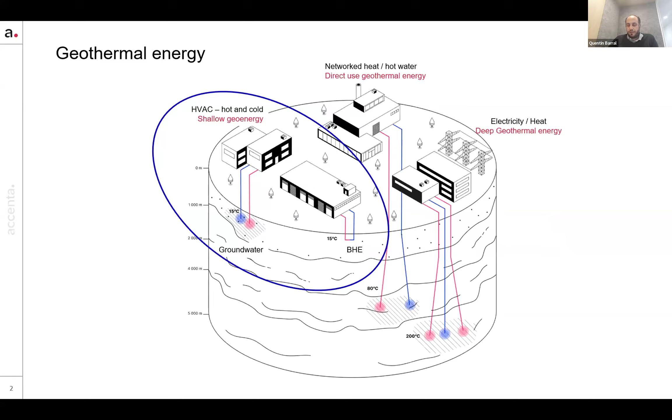Our company is working in shallow geothermal energy, so that everybody here knows about geothermal energy. Accenta is in the shallow business, few meters to 300 meters, either on closed loop borehole exchanger or on groundwater, but our concern is delivering heat and cold to buildings, individual buildings, big buildings. I will present some examples at the end of the presentation.

Our driver from the beginning, 10 years ago, was that geothermal energy and geothermal heat pumps are the best way to provide heat and cold efficiently for buildings, but it's very expensive. That's why in France, for example, where we work today, geothermal energy represents 2 to 3% of the energy shares in buildings, so it has to be used as efficiently as possible, not just in terms of energy, but also in terms of economy.

To do so, we transform the heat exchanger, which has mostly been used as a heat extractor from the underground, into a thermal battery, managing to produce, capture, or whatever renewable energy, either from industrial sources close to the building or from solar panels, either PV or thermal, and store the energy in the ground, in the heat exchanger, then produce for the building when it's needed the heat or the cold, or both, for comfort, for domestic hot water, for the process if it's an industrial site.

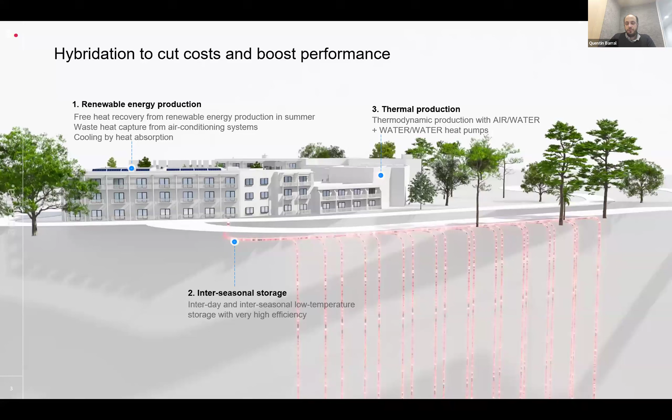In order to be able to sell it and implement it, we process all the phases from the design, from the first assessment to the feasibility, the design of this complex hybrid system, and then implement it. We work as an EPC — engineering, procurement, and construction — company, providing our clients all they need to have heat and cold produced in their building, and then operating the systems because they are complex or hybrid. They have to be.

We need to have a chief for this orchestra, and that's what our software does in the boiler room, in the technical room, with heat pumps and with the several systems.

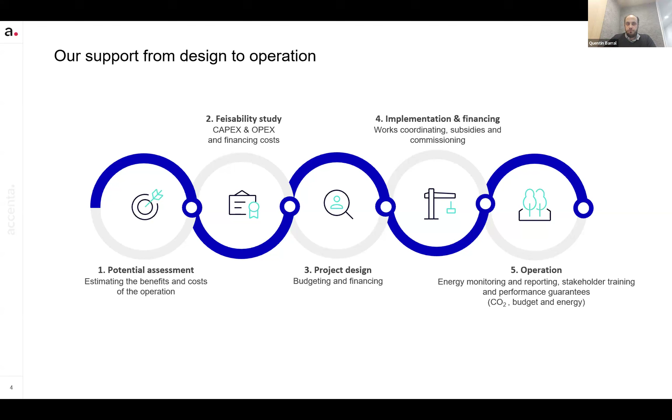Very quickly about drilling, because it's our subject for all of us in EGEC, so that everybody has the same level of comprehension: our systems are mostly based on borehole exchangers because it's more scalable, more industrializable. That's our belief, and there's nothing new in this exchanger that we do — it's very classical, at least in the French market, W probes. Very happy to look forward to the Separatus performance just after.

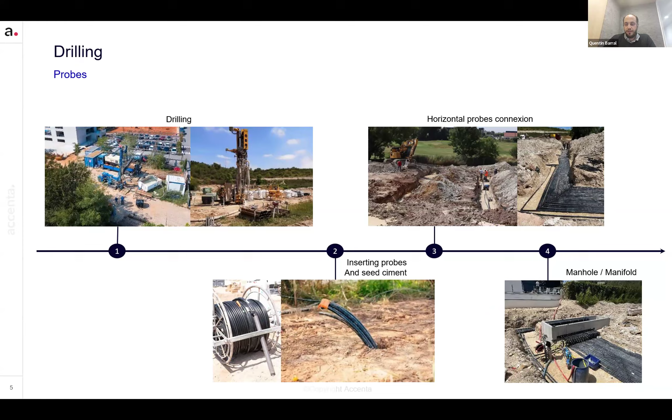Where we have developed more engineering, it's in the technical room, where we're still developing a system that can be standardized and industrialized. So here you see two water heat pumps.

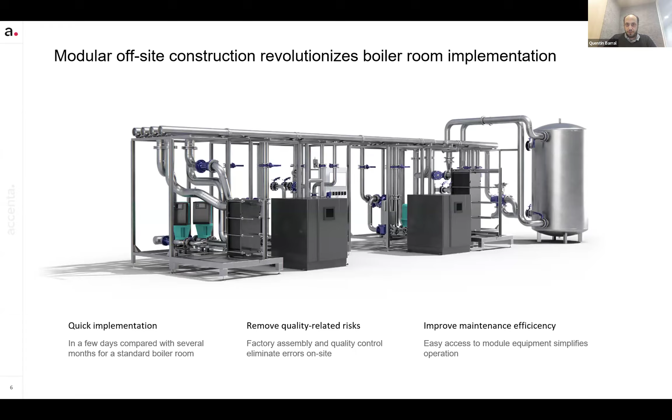You see a water tank, heat exchanger and circulating pumps, very standard for a geothermal energy system. What is not standard, and what we want to standardize, is that all the systems are built outside of the site, then brought and assembled in one week on site. It's very quick to implement and build the technical room on site, so it's much more quality, much more efficacy, and less cost compared to the classical 3 to 4 months of work of coactivity in a building for construction of the technical room.

So just a few examples, I have 4 that I will present. First, collective housing in city Gex close to Geneva, 4,300 square meters. In this system it's a mix of geothermal energy based on 17 probes, 2 geothermal heat pumps, and 3 cascaded gas boilers that have been kept to manage the very high power demand on Monday morning when everybody needs their shower. The balance in the underground for the thermal battery is managed with a field of thermal solar panels.

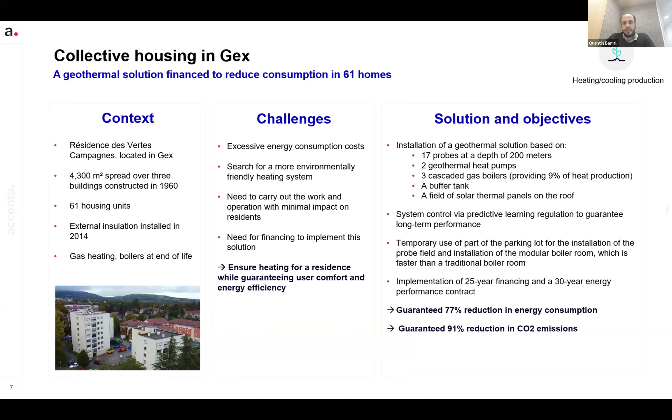Second example, this is a building, an office campus, 39,000 square meters. We replaced all the existing gas heater and classical air conditioning with 9,000 meters of borehole exchanger, cumulative length.

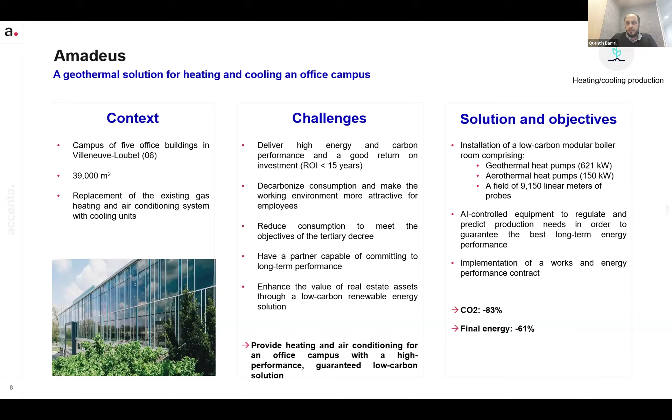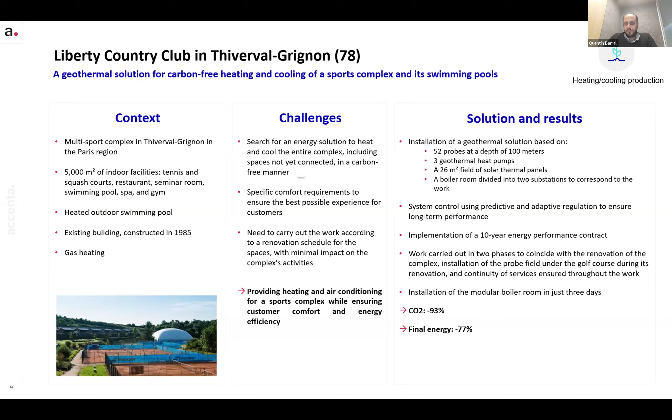Third one, a sport campus with 2 swimming pools, one indoor, one outdoor, tennis, paddle, and other indoor sports facilities, 5,000 square meters total. Here it's a mix of heat pumps, geothermal heat pumps, and solar panel—that's 265 square meters, not 26, a typo. The last one is a warehouse, a product storage warehouse, quite a big surface too, with a mix of geothermal heat pumps and aerothermal heat pumps that bring heat and cold to this building.

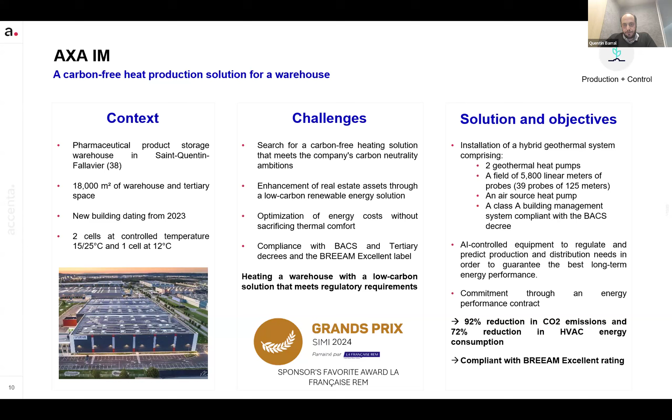That's it for the presentation.

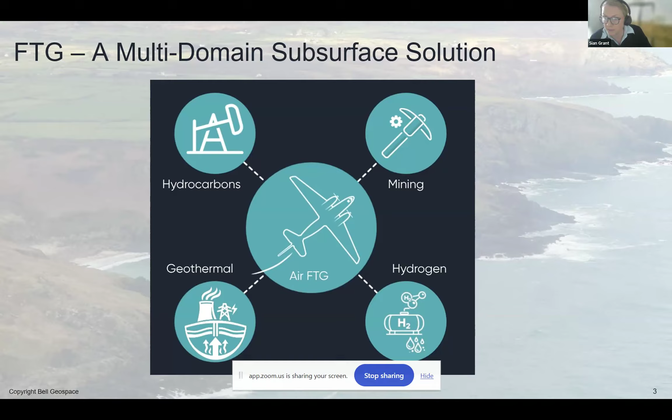For geothermal exploration in particular, this is very valuable for mapping basin architecture, major fault zones, structural controls, and potentially damage zones that influence heat flow and reservoir development. The technology is very well proven across other sectors, including hydrocarbon and mineral exploration, and more recently we're seeing real growth in geothermal and natural hydrogen exploration.

So why this particular data? What does it bring? Well, when developing geothermal projects, there are a huge number of questions to be answered, and not just in the geoscience domain.

Where are these large-scale structural controls? What are the geological structures, and what is the density contrast linked to faulting or basin geometry? And where should our exploration techniques and seismic campaign be focused?

Gravity data is particularly useful in geothermal exploration because many geothermal systems are controlled by deep structural features, such as faults, basin margins, and basement highs. Airborne gravity allows us to map these structures quickly and consistently across quite large areas.

So even where legacy data, for example seismic data or even new seismic data or well data, may be quite limited, we can combine this with the FTG to construct a good 3D model of the subsurface, helping us understand basin geometry, what the major fault corridors are, and the depth to basement across our area of interest.

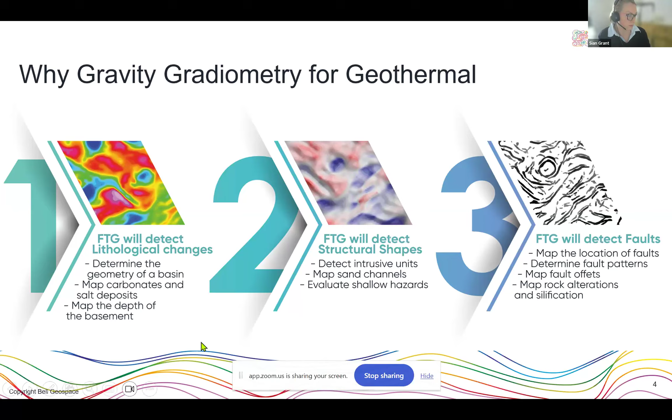So exactly where does it fit in the process, in the exploration phase? Throughout the project exploration and development stages, there's a need to balance exploration value with budget. Airborne gravity is often introduced in the early stages, where it can rapidly map large areas and identify regional structural trends at a very competitive cost.

As the exploration progresses, the data supports screening and evaluation and helps us define basin architecture and map out fault corridors that may control permeability and fluid flow, helping us prioritize the most prospective areas before moving on to other techniques, on-the-ground techniques such as seismic surveys and drilling.

And not forgetting the other challenges associated with geothermal projects. One of the realities is that the majority of these projects are going to be located close to towns, infrastructure, in densely populated areas. So that's going to create more challenges for traditional ground-based exploration methods.

Seismic acquisition, ground gravity, other surface techniques can face permitting constraints, environmental restrictions, access issues, and community concerns. Airborne full tensor gravity gradiometry offers a very useful alternative in these situations because the survey is flown from an aircraft. It's completely non-invasive and requires no ground equipment, no line clearing, and somewhat easier permitting to get the go-ahead for a project.

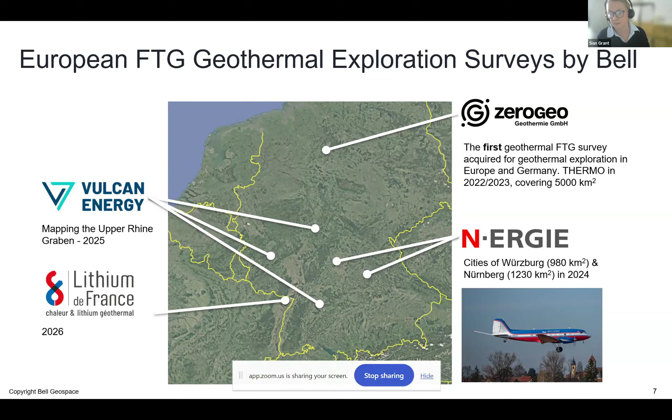As you see there, we have a couple of ongoing projects, one with Vulcan and one with Lithium de France. And these have dual purposes: geothermal energy and lithium brine extraction.

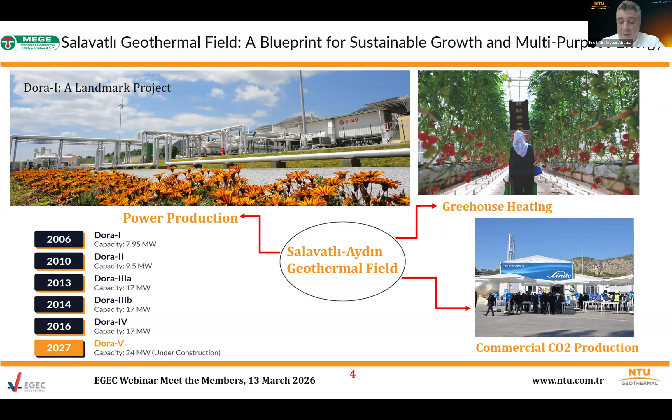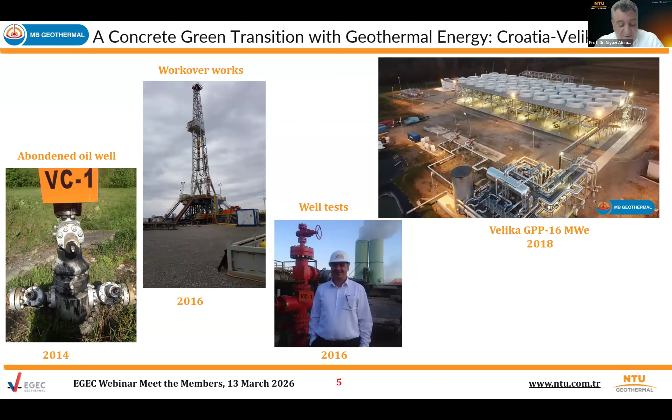As a result, the 16 megawatt Velika geothermal power plant was commissioned in 2018. Not only is Velika the first geothermal power plant in Croatia and the Balkans, but it also proved that the Pannonian Basin is one of the world's most important geothermal areas, with a potential of thousands of megawatts.

On the third example of NTU studies, we focus on the environment. Non-condensable gases, or NCG, produced together with geothermal fluids are mainly greenhouse gases and represent one of the key challenges in geothermal development. At NTU, we implemented a project to dissolve these gases into reinjection fluid and return them back to the reservoir. This is one of the most cost-effective ways to protect the environment, support sustainable production, and help mitigate climate change. The picture shows the compressor of an NCG injection facility in Turkey, where NTU provided consultancy and engineering services for Sanko Energy.

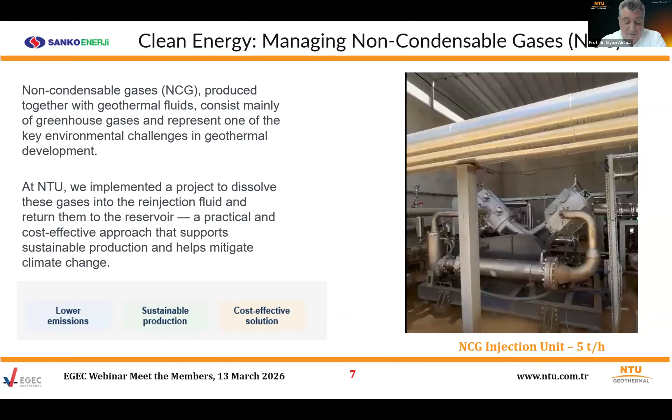Finally, that concludes my presentation. Thank you very much for your interest.

Thank you, Niyazi. Really interesting. I'll look if there's a question for you, not at this stage. So we understand that you're a consultancy company based in Turkey, but you operate all over the world. You mentioned projects you did in Turkey, Indonesia, Philippines. Are you still looking at this market, or do you focus more on Turkey, because we see now a new wave of power plants in Turkey?

Yeah, we have been studying many projects in Turkey, but some economic crisis exists in Turkey, so the geothermal projects have slowed down a bit, but at least 100 megawatts of power plant capacity is still under construction in Turkey now.

We are also studying in Croatia. Another Turkish company, Soyak Energy, is trying to improve a geothermal power plant in Croatia, but as you know, some bureaucratic problems are still slowing our projects there.

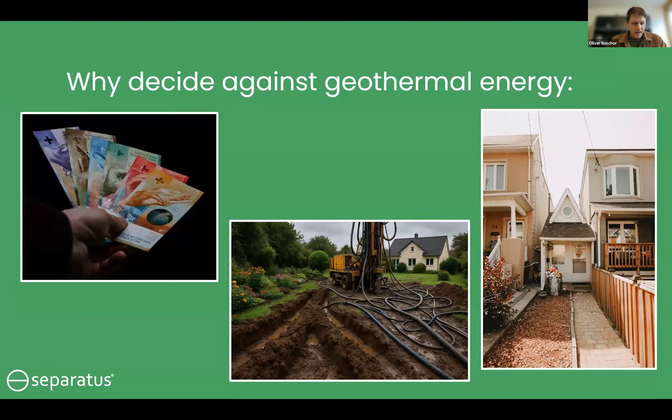We have developed the Separatus system, a solution with a modular, slim geothermal system where we have a split pipe technology. So we combine flow and return in the same pipe, separated by a thin wall in the middle, to realize geothermal energy for less cost, with less damage, and with less space needed for the realization.

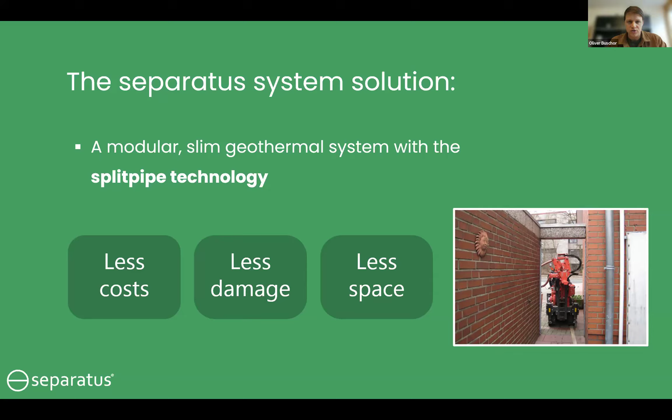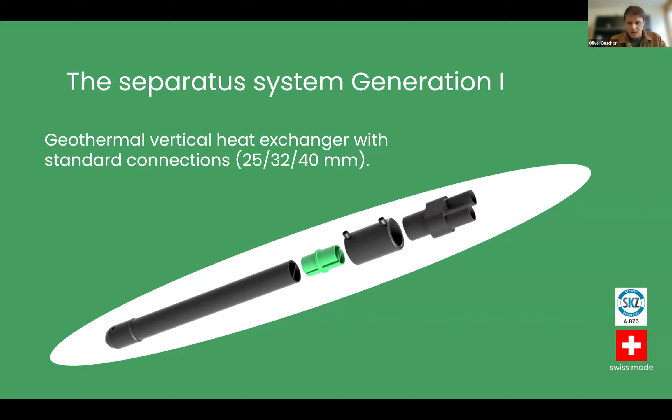So I will give you a short introduction about our system. What we have at the moment is a geothermal vertical heat exchanger, like a borehole loop with a standard connection in either 25, 32 or 40 millimeters at the top. We have the borehole loop, and a little connector which allows connecting the flow to the chambers of the flow and return with the head correctly, and then everything is welded with an electrofusion fitting. The probe is Swiss made, and we are already certified by SKZ.

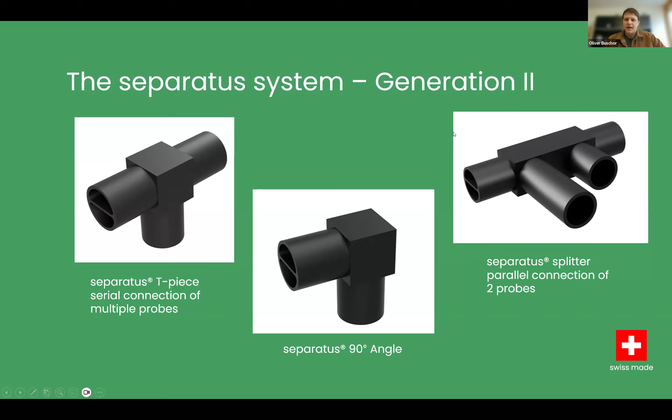We also developed the second generation of our products. We just published them last month at Geotherm in Offenburg. So we have a T-piece for the serial connection of multiple probes, a 90-degree angle to use the split pipe as well for the connection line, and we also have a splitter to connect two probes in parallel. In the long term, we also want to develop the manifold chamber with the split pipe technology.

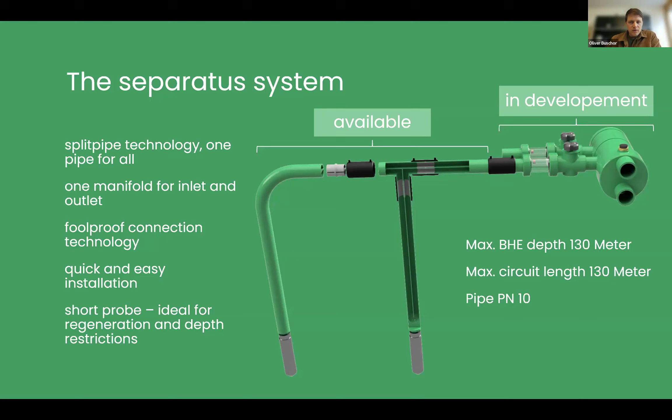So you only have one manifold chamber for the distribution and for the collection. The Separatus system, to say it in a few words, has a foolproof connection technology - you cannot connect them in a wrong way. It's quick and easy to install, and we developed especially a probe for short boreholes up to 130 meters, which is ideal for regeneration, but also if you have any depth restrictions. The pipe itself is PN10, so it's also a bit limiting the depth.

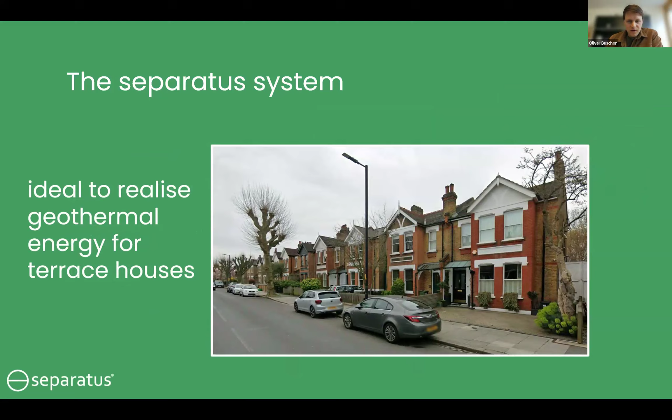So what we see is that we have an ideal solution for geothermal energy, for example, for terrace houses, but there are so many to be renovated, or where the heating system has to be changed, but there is no space for big drilling rigs. With air source heat pumps you also get some problems because of the noise towards the neighbor, so it's a very difficult area.

We also have the possibility with our borehole loop to energetically activate structural components in areas such as foundations or underpinning, anchorage or soil nailing. Our probe has a diameter of only 51 millimeters, so it fits in very small components, and it can be hydraulically connected in series very easily. So we started this cooperation with Ischebeck Titan, one of the well-known producers of micropiles.

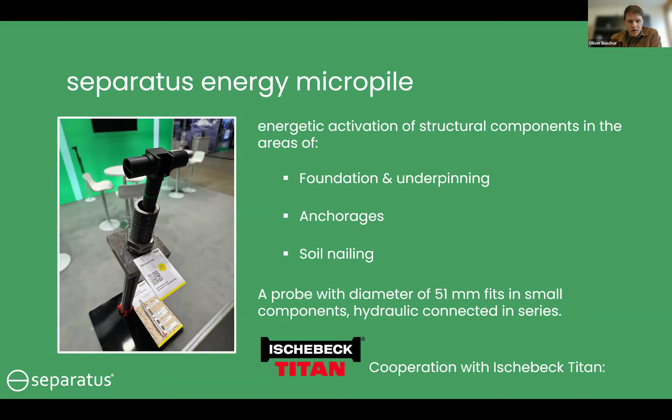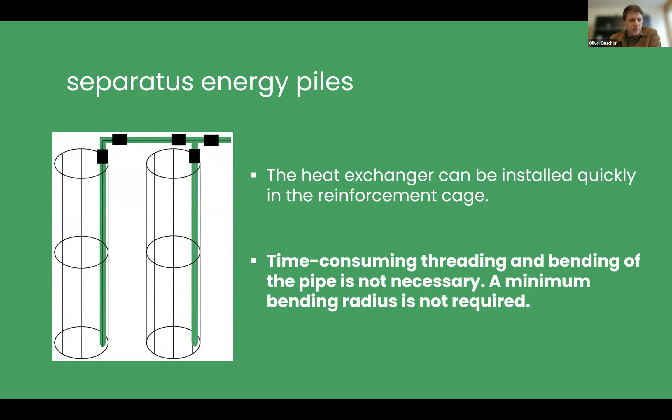Here you can see an example of a micropile which is self-drilled and backfilled with cement, and you can then install the Separatus probe into the inner part of the pile, which so far has usually no real usability. But you can also install Separatus in standard energy piles, where you just attach them to the reinforcement cage, so there is no time-consuming threading or bending of the pipe, and a minimum bending radius is not required. So I want to share with you the benefits of our system.

So the biggest benefit is that you can reduce the drilling diameter. With Separatus, you can drill with 100 millimeters and still install the probe easily and comfortably. If you compare it with a standard system, W32, that's often drilled with 152 millimeters, so it's much bigger.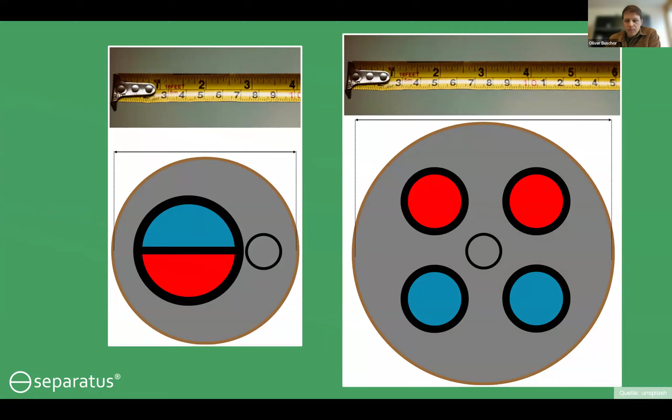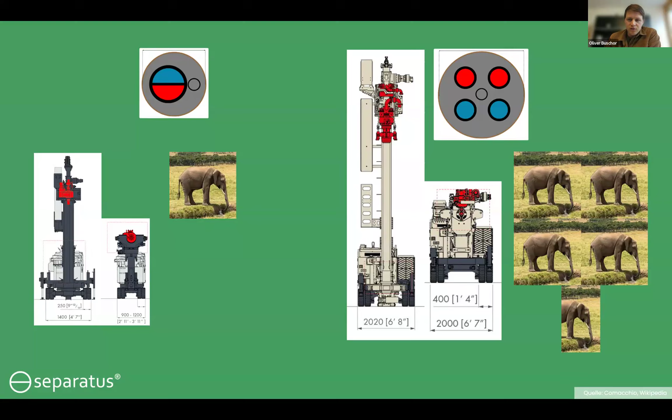Then the big advantage is that you can use a small drilling rig. I compare it here concerning the weight. So you can use a drilling rig with 3.6 tons, which is the equivalent of one elephant. In the standard we see today, a lot of borehole loops are installed with big drilling rigs, 15 to 16 tons, the equivalent of 4.5 elephants.

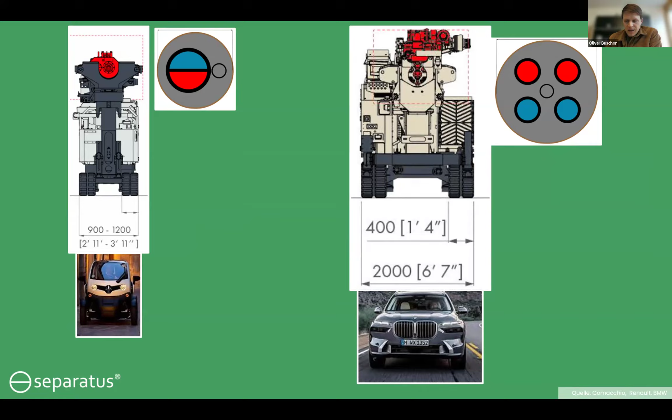But the size of the rig itself is also very important if you want to increase visibility in narrow spaces. On the left you can see the small drilling rig specifically used for Separatus, which can have a width of up to 1 meter, so it's very small. You can get into gardens. On the other hand, you have the big drilling rig with almost 2 meters width. You do not get into the garden easily, and you make a lot of damage once you're there.

And then if you compare backfilling material for 100-meter borehole depth: with Separatus and 100 millimeters, you use about 0.6 cubic meters. With 152 millimeters, it's almost 3 times more, so 1.5 cubic meters. That's real money you put into the borehole for only a little effect.

Then I want to show some references with you as well. We started the company in 2023, so we are still a small startup. We did the first test projects in 2024, and now we're in the market with EGEC certification since 2025, but we were already able to do realizations in Switzerland, Belgium, the Netherlands, Germany, Austria, and the Czech Republic — most recently in February, our first installation there. We will have our first installation in Spain in summer 2026, and we're looking for the first projects in the UK as well as France. If you know somebody, or if you're ready for this innovation, just get in contact with us.

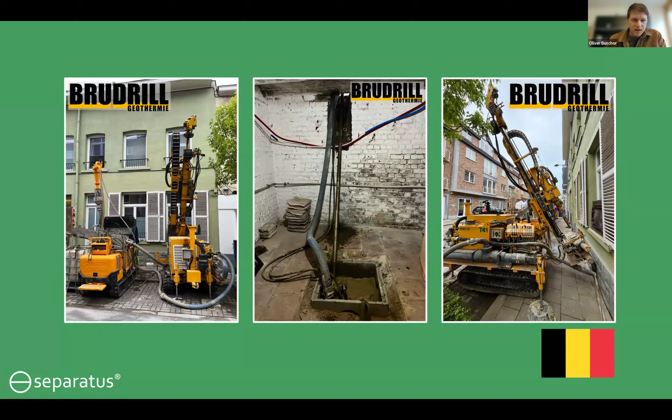I want to show examples, for instance from Belgium, where we work with Brudrill Geothermie, our drilling partner. They're specialized in geothermal energy in urban spaces, so they have small drilling rigs. Everything on the construction site is engineered to drill small diameters as well. So they really think about geothermal energy, and they can realize projects where everybody else would think it's not possible at that place.

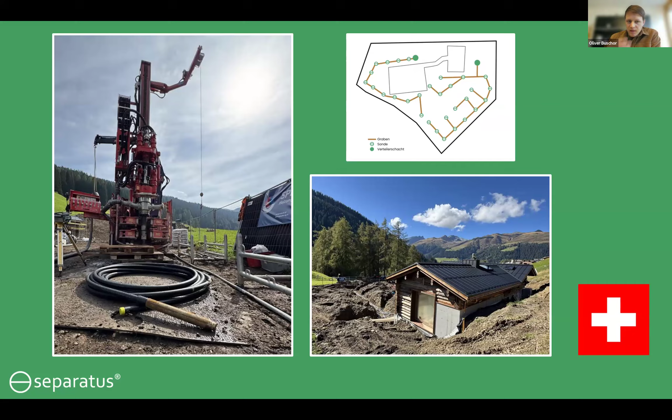We have references in Switzerland. Here's an example from Davos, almost 2,000 meters above sea level. The driller found artesian water, so he couldn't drill to 200 meters as he originally wanted. Then he switched to Separatus, and we realized 30 boreholes with 40 meters depth, with each 3 boreholes connected in series.

We also did realizations in Austria, where we could replace the heating system for a very old building, and it works very well at the moment.

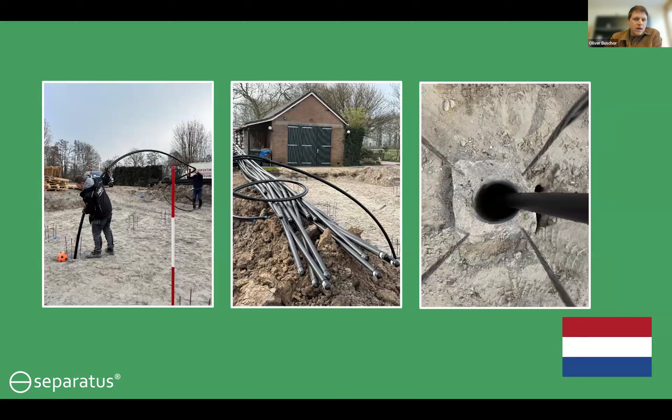In the Netherlands, we were able to activate energy piles. The piles were needed for the foundation of the building, and we were then able to deliver the probes for the geothermal activation of the piles.

So yes, we are Separatus. We are a young company, and we always think win-win, and we are actively looking for global collaboration partnerships. Thank you for the time, and if there are any questions, reach out to me.

Thank you, Oliver. Really clear, and really nice to see all this innovation and startup activity in geothermal. I don't know if there are any questions.

Me, I have a question. Is that so — you're a Swiss company, you manufacture everything in Switzerland, so showing again Switzerland as a champion in equipment manufacturing for shallow geothermal. How do you plan your next development in the business model — as manufacturers, developers, installers, operators?

We have outsourced the manufacturing to our partner who is extruding the pipe, and we have a partner in Germany, who is also an investor in the company, who builds the head and all the tools we are needing. From our side with Separatus, we mostly want to sell our probes to drillers or to investors in building development, but we also want to go new ways and do the marketing for geothermal energy directly to end customers.

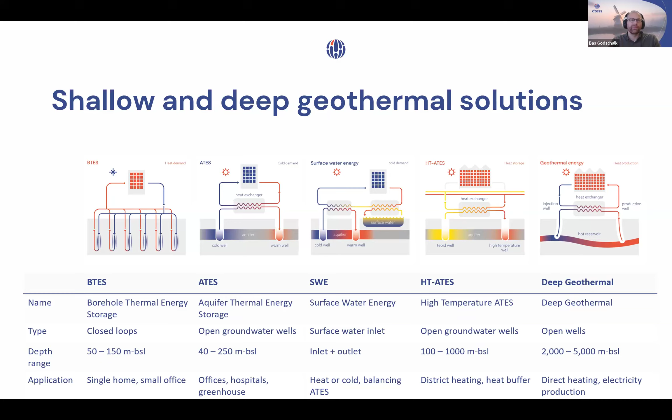The source for these systems could be deep geothermal. So I have some experience with deep geothermal, but my primary focus is on ATES, surface water, and high temperature ATES. Now let's dive a little bit more into the ATES technology itself - it's a very nice technology for heating and cooling buildings.

You have to think that the best performance is when it works as a battery of heat and cold. During wintertime, you take out the cold from the building and store it in the cold well. Then during summertime, you abstract the cold water, use it for cooling down the building, and the heat of the building will be stored in the warm well, which you use in wintertime to heat up the building.

Normally, we operate the cold wells with temperatures around 5 to 10 degrees. The advantage of that temperature level is that you can use it directly for cooling your building, which gives you a very high COP. In heating mode, the warm well is often between 13 to 17 degrees, and when you heat up the building, you need a heat pump to increase the temperature level to 40 or 50 degrees for heating the buildings.

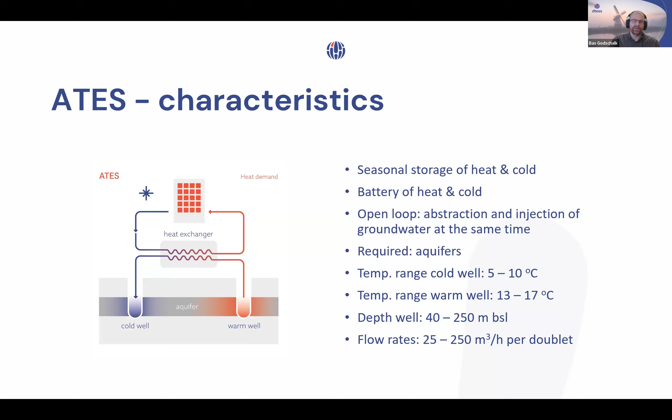A requirement of this technology is that you need aquifers. That could be sand aquifers, but in some cases, like in the UK, we have worked with limestone or sandstone formations. Typical flow rates are between 25 to 250 cubes per hour, which generates a capacity of 250 to 2 megawatt cooling or heating capacity per doublet system. A doublet is one warm well and one cold well.

As mentioned, in the cooling mode, because we can have direct cooling of the building, you have a very high COP, coefficient of performance. So with one piece of electricity, you generate 30 to 40 pieces of cold. Compared to air conditioning, the COP is 3, so one piece of electricity gives 3 pieces of cold. You can see that this is a very efficient technology.

In the heating mode, you always need a heat pump, which limits the COP to 4 to 5. The advantage is that this is one unit, but if you need more, you can multiply the number of doublets, so you can increase your capacity and tune and design it according to the wishes and demands of the building.

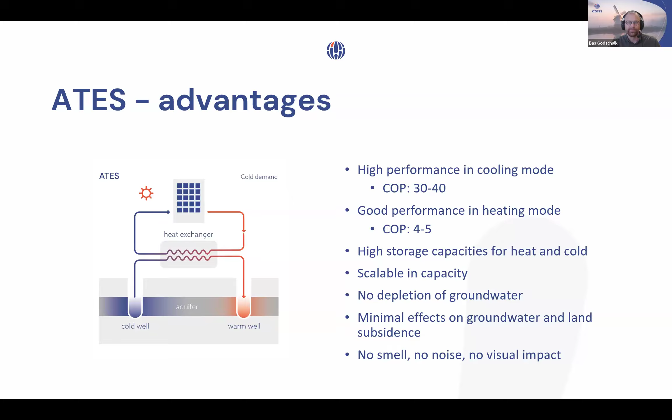Now, where is this technology applied? Especially in office buildings, because office buildings often need heating and cooling, so that's a very good combination. Nearly all Dutch hospitals have the ATES technology. We see it in university campuses, also in greenhouses, airports, shopping centers, residential areas, and also data centers is an upcoming market.

They use the ATES system to store cold and then reuse it for cooling the data centers themselves. The new step is that we not only use the ATES system for heating and cooling, but as a heat storage medium, large-scale heat storage. You can use it in the middle range temperature, between 30 to 50 degrees, and also in a high temperature ATES system with temperatures between 50 to 125 degrees. The idea is that in summertime, there's often a surplus of heat, or there's still production of geothermal heat or solar panels or collectors producing heat that you don't need at that moment. So when you store it in your ATES system, you can reuse it during wintertime when there is additional need for heat.

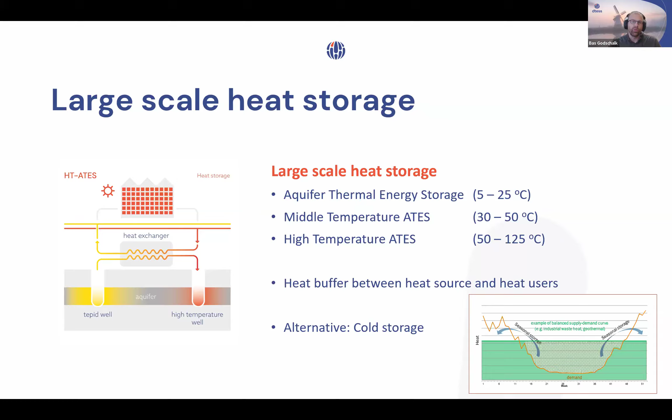Now, why am I working on these technologies? Because I'm really motivated to bring this technology abroad. In the Netherlands, about 40 years ago, we started with the first systems, and during the years we've seen an increase of ATES systems in the Netherlands. At the moment, we have around more than 4,000 systems.

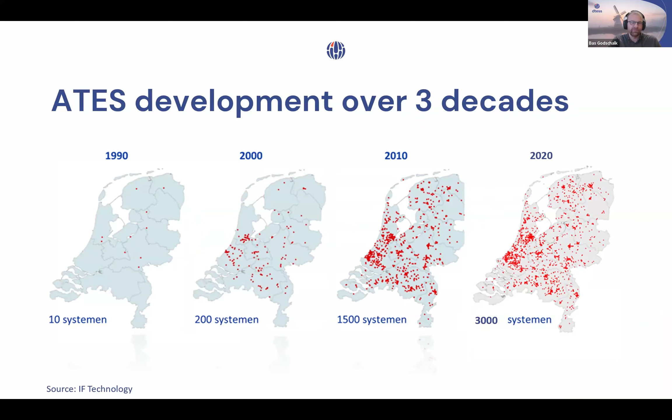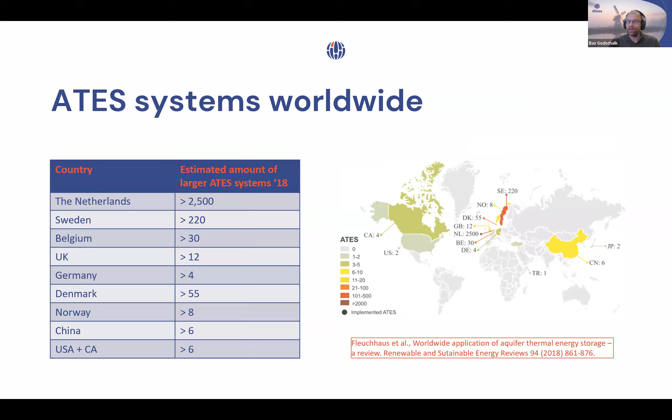But when I look around the rest of the world, and this is published by a German PhD student, I see that in the Netherlands there are many systems, but in the rest of the world we just see a very small number of ATES systems. That was my strong motivation to say, okay, how can we spread the knowledge, technology, and experience of ATES in the world? Because I believe it's still a sustainable and reliable technology, but due to a lack of knowledge and experience, it's not so applied in many other countries.

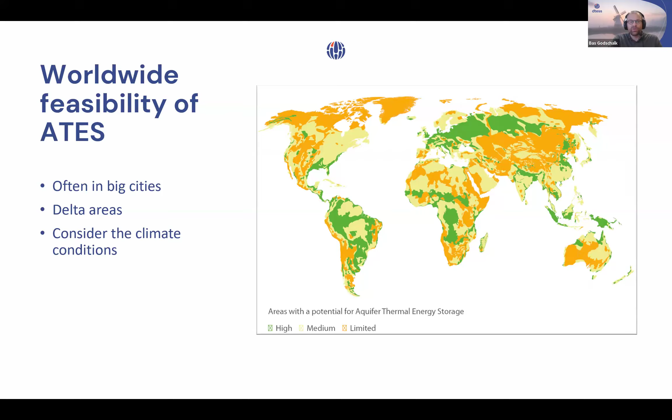So is it possible in other countries? I think yes, especially in the green areas. It's also good to know that these green areas are often kind of deltas, areas where the big cities are present too. So I believe that this technology can be adopted in many more countries.

Now, what is my specific role in this? I think I have three pillars in my company. First, I would like to help initiatives from idea to realization by doing feasibility study, design, permitting, and also supervision.

We also help reduce costs in other projects. Second, we do not set up our own companies in every country. Instead, we support other companies to develop the ATES business themselves. For example, in Japan, they want to build this business, and we can help them understand the value chain, the relevant stakeholders, and the critical success factors, and how to make it a success in their own country. We do this by sharing knowledge, giving trainings and courses, and organizing trips and fact-finding missions to the country or to the Netherlands to see and observe.

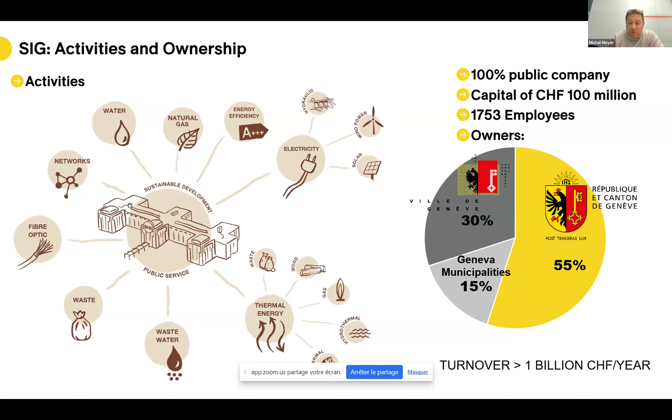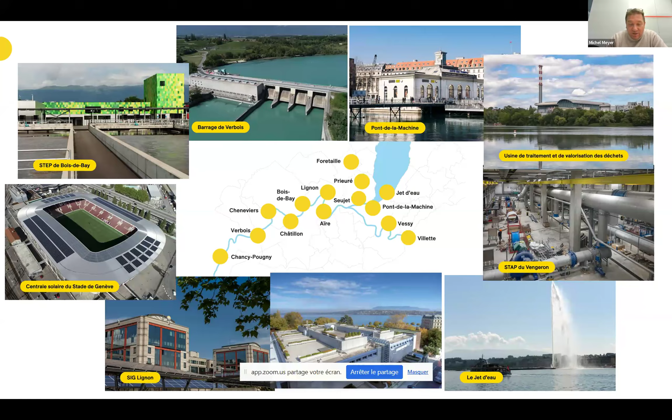It's a utility, a public company owned by the canton of Geneva and Geneva municipalities. Like many utilities in Switzerland, we're involved in many activities: water supply, drinkable water supply, natural gas supply, energy efficiency, electricity production and distribution with different producers like hydraulic, wind power, and solar plants. We also work on networks and optic fibers, waste management, water treatment and wastewater, and increasingly in thermal energy, which is quite new for us and in strong development today. The company employs more than 1,700 people in Geneva with a turnover of more than 1 billion Swiss francs per year. All our assets are on Swiss, Geneva territory, a very small area of approximately 300 square kilometers, including dams, waste management and incineration plants, pumping stations for water supply or district cooling, solar plants, water treatment plants, and we even pilot the exploitation of the Jet d'Eau, the famous water fountain in Geneva. So we're active in many fields.

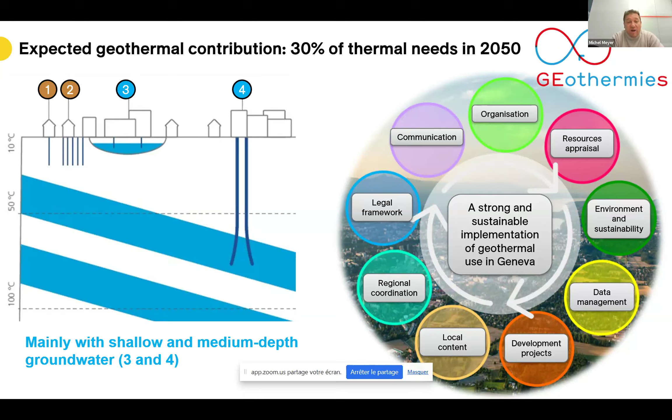Together with the canton of Geneva, a bit more than 10 years ago, we launched a development program for geothermal energy called GEothermie2020. This program aims for a strong and sustainable implementation of geothermal use in Geneva. We are trying to develop all types of geothermal energy: shallow closed loop systems, shallow open loop systems, and now we're focusing on deeper targets, medium depth geothermal systems. In this program we worked a lot on resource appraisal and geological exploration, but also on other aspects like the legal framework, regional coordination, data management, and communication, all to develop a good framework for geothermal energy development.

Today I will focus a bit more on what happened with the medium depth geothermal systems, because as everywhere in Switzerland, we don't have any oil and gas traditions. So it means we had to begin from scratch. The deeper underground is not known in Switzerland.

In the beginning, we launched some 2D seismic lines that allowed us to drill two first wells. A deeper well, not so deep for some of you, 700 meters for the first one, 1.5 kilometers for the second. The first well was very productive, highly productive, with a high flow rate. That's an artesian flow rate, and the picture you see is without any pump - it's the 10 bars of pressure we have in the reservoir. This well was really important for us because it showed that if we drill at the right place, we could have good flow rates.

The second well was an exploration well in a completely different geological context, and we learned a lot from it, a lot of geological surprises. We learned aspects that were not known about the underground of Geneva, but there the flow rate was really low. This decided us to launch a huge 3D survey that was done at the end of 2021 into 2022.

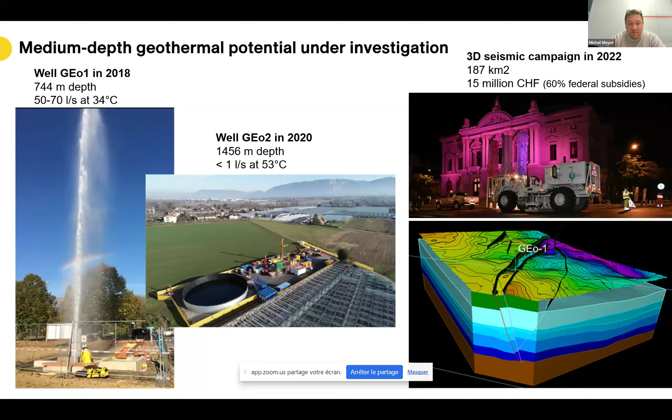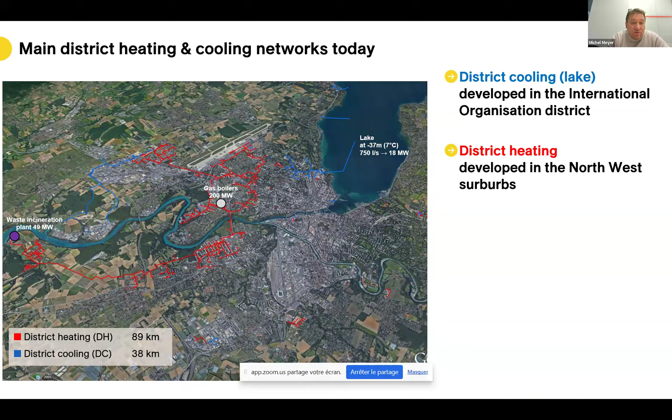Why we focused so much on medium depth geothermal systems is because we already have district heating and cooling networks in Geneva today. This map shows the situation 2-3 years ago. In red you have the major district heating in Geneva. In blue, the main district cooling system, mainly fed by water from the lake. The district heating is mainly fed by a waste incinerator shown here in purple.

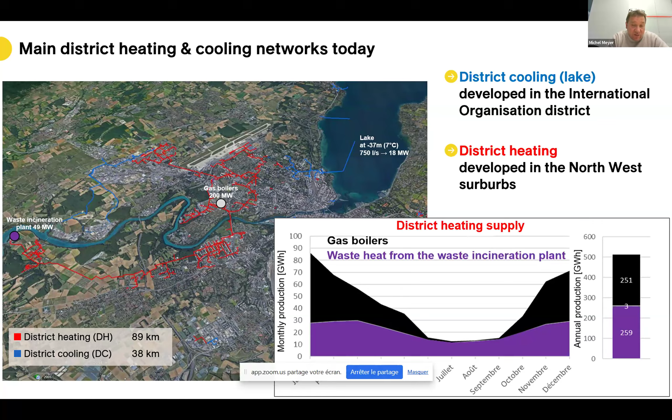That's the situation today, but it's under strong development because the population of Geneva voted to ask us, the public company, to strongly develop district heating and cooling in Geneva. This means we have to double the size of the network during the next 10 to 15 years. In orange you have the extension of district heating that is under construction.

There are many building sites everywhere in Geneva. In light blue you have the extension of the district cooling system. It's mainly fed by water from the lake, but also produces heat with large heat pumps. The major issue is that we not only have to develop this district heating, but we are committed to having at least 80% non-fossil energy in this district heating by 2030.

So in the meantime, we are developing the networks but also working on several new production facilities based on renewables. The major facilities are related to lake water heat pumps, sewage water heat pumps - meaning water linked to water treatment plants - but we are also working on heat recovery from data centers and waste wood boilers.

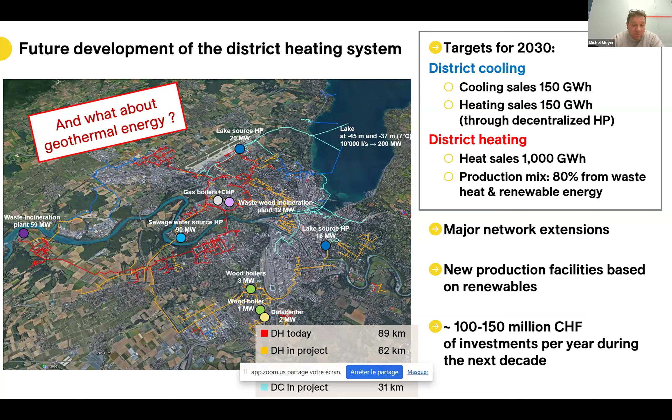The question 2-3 years ago was: is it possible to integrate deeper or medium depth geothermal facilities into the system? And of course, with the 3D survey we launched three years ago, it seems to be feasible. So I'll show you this slide, a kind of animation.

I will press the button and you will see an animation showing the extension of the network during the next 15 to 20 years. You will see new colors appear, connected to the new producing facilities that will be installed. So I press the button and you see, year after year, the increasing size of the network.

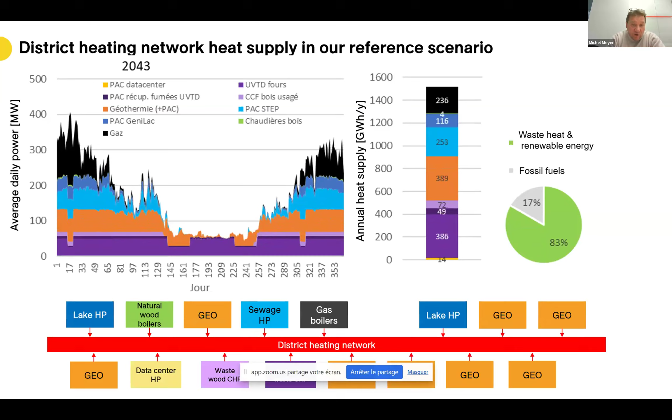What you have in blue is connected to the large heat pumps linked to water from the lake and sewage water. And what you have in orange are the geothermal facilities we plan to implement in the system. This means we presume we could drill 6 to 10 doublets to feed this network. That's quite ambitious, but today we have good targets that have been found through the 3D acquisition.

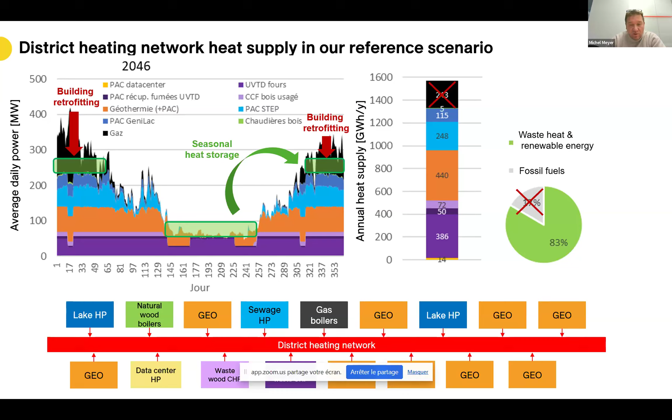And well, that's not the end of the story, because we also would like to decrease the gas consumption. So we are working and engaged on seasonal heat storage solutions. Together with the canton, we are also working on building retrofitting programs in order to decrease heat consumption and to be as soon as possible 100% renewable in our network. So it will take time, but it has been launched today.